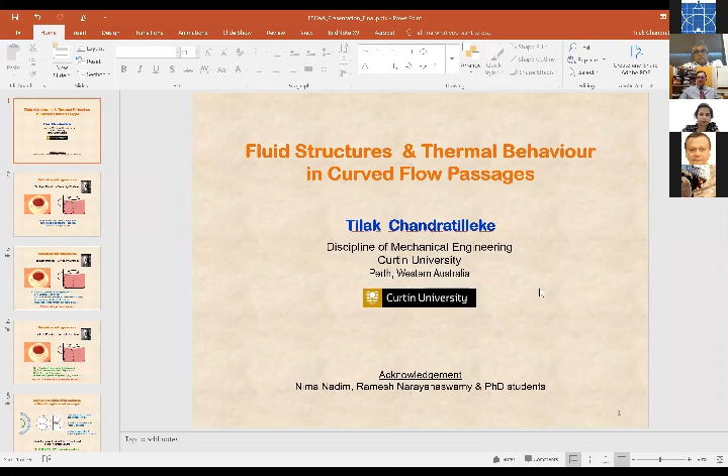So let me go back to my PowerPoint presentation. The title of my presentation is Fluid Structures and Thermal Behavior in Curved Flow Passages. Very simply, we are looking at curved passages and the fluid structures within that passage, which also brings in certain kinds of flow behavior. Normally the fluid flow passages are used to transfer heat or extract heat from a particular device. So that is the main thrust in this particular work or presentation.

Before I go into the actual details, I'd like to acknowledge my co-workers over the last maybe 20 or 15 years - Nima Nadim, Ramesh Narayanaswamy, and a numerous number of PhD students who have gone through my type of research and produced outcomes which I'm going to present to you. It's not just my effort, it involves a big team of people from time to time.

This particular observation of flow through curved passages initially came through a very simple day-to-day experience. If you have a cup of tea, like what I have shown here, and you start stirring it, you'll find that the tea leaves actually get into the center, not to the edges of the teacup. These days we have tea bags, so we don't have that tea leaf issue, but in the past we always had loose tea leaves. So when you boil water with the tea leaves, you have some leftover tea leaves. When you start stirring the teacup, you find the leaves don't go to the edges, they come to the center. Now this was quite puzzling.

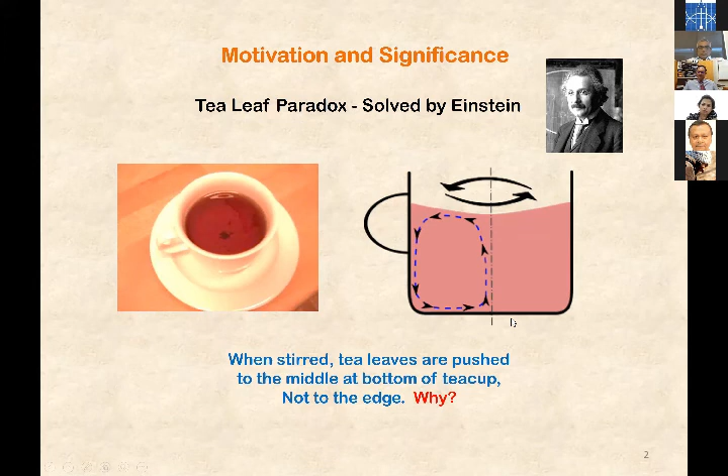In this particular process, what's happening is essentially that when you have a rotation like this, when you start rotating a fluid, it's the centrifugal forces at work. The centrifugal forces are the ones you observe or feel when taking a turn in a car, train, or other vehicle - you feel that somebody is being pushed to one side. Now this centrifugal effect creates a loop of circulation. We are turning the fluid along the vertical axis, but the circulation of water happens perpendicular to the direction of the rotation. This happens due to the pressure gradient between the outside and the center. That particular motion is always perpendicular to the direction of rotation.

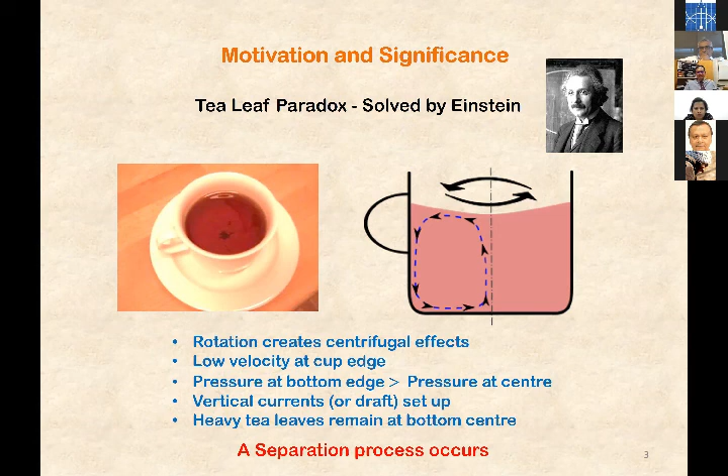So this is why the tea leaves come to the center and remain there - even while you're stirring, it stays almost stationary within the center. This is actually a clear separation process. If you want to separate the tea leaves from the liquid tea, you can apply this kind of process. This is actually being used by many technological devices in the past, and even in blood test situations, you want to separate the blood cells from plasma. So you have a rotational device, a magnetic kind of rotation, and through that rotation you can separate red blood cells, which are heavier than the plasma, to the center.

There are also cyclonic vacuum cleaners, modern vacuum cleaners, and certain separators in the cement industry, dust separators, and grain separators - you can use the same technique. And bladeless fans - nowadays we have bladeless fans and hair dryers.

I can't mention the brand, but you can easily guess what it is. These bladeless fans also operate on the same principle. Or when you go to the toilet, you see hand dryers where you put your hands in and it works automatically. That kind of hand dryer operates on the same principle. And in nature, we have atmospheric pressure systems, tornadoes, that kind of thing, which again have similar behavior. We have a rotational fluid mass, and then another rotation perpendicular to that motion.

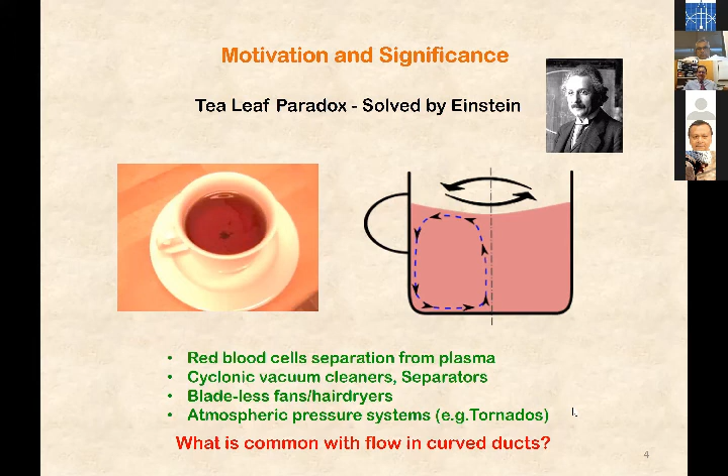So this is the clear motivation to do this kind of work in research. I undertook this challenge, and you might ask what is the common thing between what I just mentioned versus curved ducts, which I've been looking at. Now obviously there's a connection, and that connection is through the unique fluid structures or mechanisms that you find in flow through curved passages. That's what I'm going to talk about.

This particular fluid motion creates some kind of circulatory fluid motion within the channel. This behavior is clearly unique to curved passages. The circulatory flow is going to be superimposed on the flow through the channel itself. So the flow goes through the channel as an axial flow, and this circulatory motion is superimposed on it, giving a spiral kind of fluid motion to the axial fluid. This is not commonly found in any other pipe systems or geometry — in a straight pipe, the fluid flows directly through without this circulatory spiraling motion.

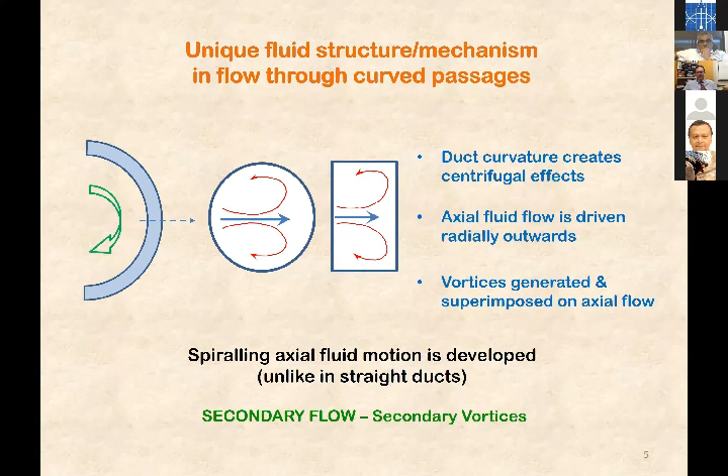Now it's not the end of the story — we can look at some other things as well. When the centrifugal force is in action, it also creates what's known as an adverse pressure gradient. Adverse means the pressure gradient developed by the fluid is against the fluid motion. You can see the fluid is flowing in the direction of the arrow, but the pressure gradient will be increasing in the same direction. That's not normal fluid behavior — normally fluid flows when there's a pressure gradient, but pressure has to drop from inlet to outlet. So here we call it an adverse pressure gradient, meaning it's against the fluid motion.

When this kind of flow happens, the fluid obviously gets slowed down as it reaches the boundary here, and also at the boundary on the other side. As you keep increasing the flow rate, at a particular point the flow reverses, because it can't remain there when the pressure is higher here compared to the other side. So the outer wall reverses the flow and creates another pair of vortices at the outer boundary. These additional vortices are called Dean vortices, named after the scientist who discovered this phenomenon, W.R. Dean. This phenomenon of Dean vortices appearing is called Dean's instability.

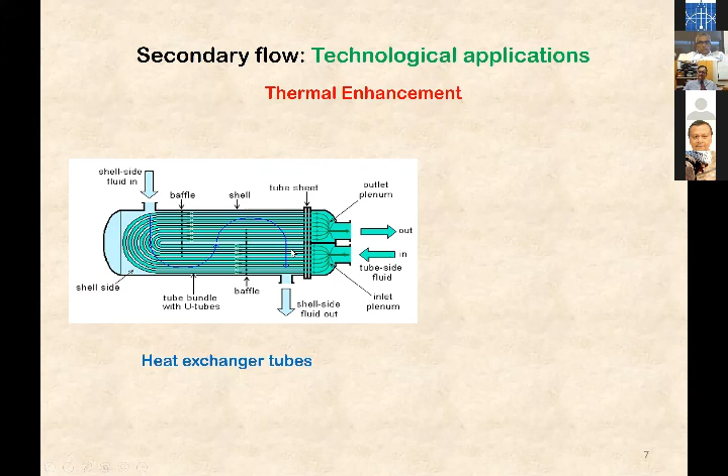If you take a normal heat exchanger, the fluid will go through a curved section - invariably you have a U-turn, or a baffle kind of flow. In all those places, secondary flow is in action. You don't see it, but it's happening in there. Similarly, you can have special geometries for heat exchangers. This is one I have developed previously - it's called the spiral coil heat exchanger, SCHE.

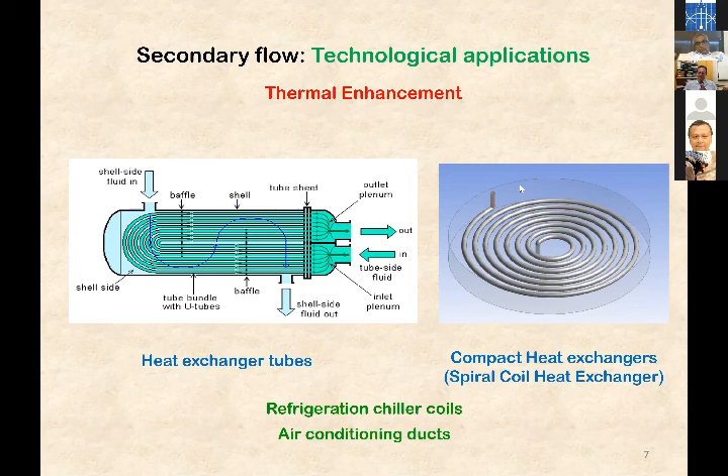You can use this kind of device for refrigeration, chiller coils, or air conditioning ducts. I have numerous projects I've attempted before in these areas. Thermal enhancement can be extended to much more advanced systems - turbine blade cooling is one option. The turbine blades have a curvature; obviously you have to have a curvature in turbine blades. As the fluid flows over the turbine blade, the cooling or heating mechanism is much improved due to this curvature effect as well. So that's another interesting option.

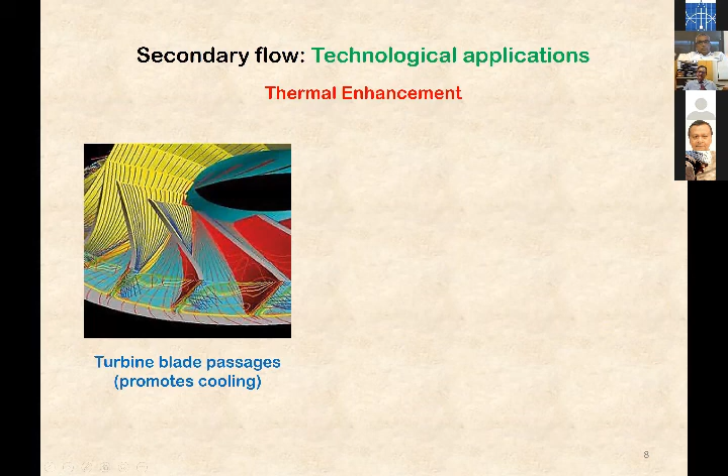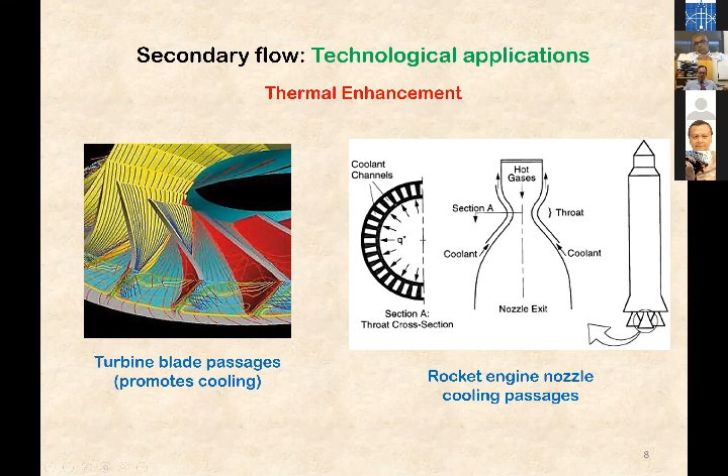Closer to home, we have more interesting applications like modern vacuum cleaners. You have cyclonic separators in modern vacuum cleaners. You feed the mixture of dust and air into that cyclone, and it sets up a rotational or cyclonic motion, and that motion separates solids out of the system, and the clean air can actually leave through a different path. So that is what you mean by cyclonic separation.

With that particular device, you can make vacuum cleaners without a bag. You can separate the solids. You can even have grain separators, the husk from the grain - for instance, rice husk can be separated from rice. You can also separate cement particles from air. All this can be done with this particular technique. This involves the secondary flow.

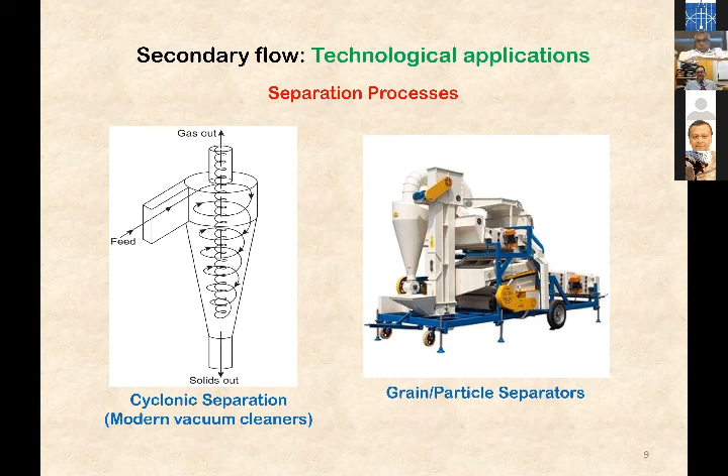You don't see that from outside, but that's the mechanism behind it. And in nature, we also find this kind of thing very easily.

If you look at a tornado, it has a very circulatory motion set up by the temperature differences in the atmosphere. That sets up the vertical motion. You can see the air mass around the tornado rotates in a circulatory manner, but the actual motion is vertical through that eye of the tornado. That's where the destruction is, because this is a very high speed draft coming through the center - that is the most destructive part.

Now that's what you see in this picture. You can see the tornado pulling out debris from the ground. Even houses, cars, and other things can be pulled with sufficient suction power in the cyclone. So that's again very much a secondary flow effect.

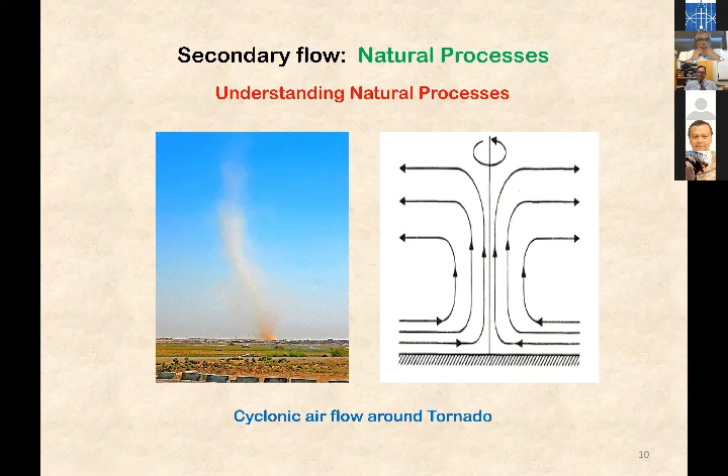Another very interesting application is riverbank erosion and sedimentation. Here we have a river going through a bend. The river takes a bend, and whatever soil is around the outer boundary is picked up by the secondary vortices and dumped inside the inner boundary. You can see the inner boundary getting filled while the outer boundary gets eroded in this kind of situation. This picture shows the sedimentation happening here and the erosion happening here.

So this is again very much a secondary flow effect, and that's one of the research areas that I have examined as well in my latest research.

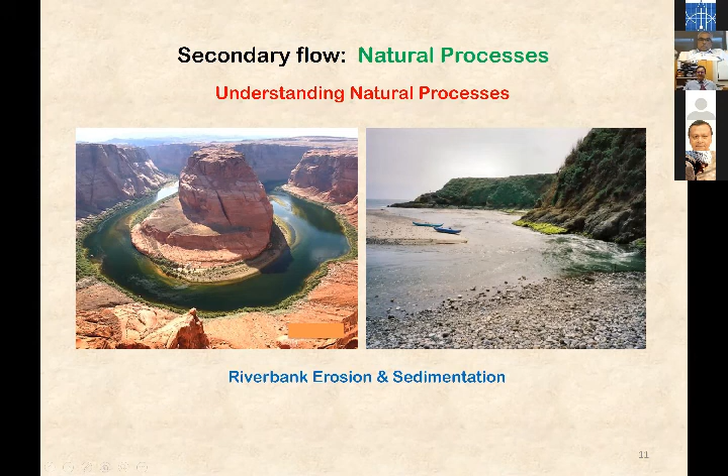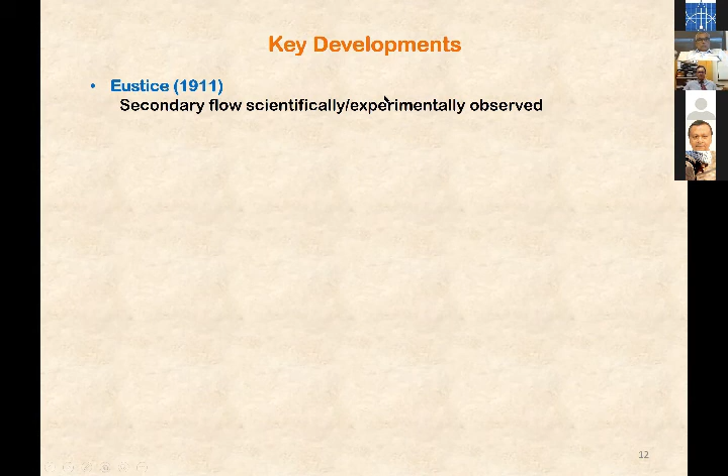So what are the key things developed over the years? The very first incident of secondary flow scientifically and experimentally observed was in 1911 - almost 110 years ago - by a person called Eustice. Later on, W.R. Dean - you remember the name now, Dean, the Dean vortices - related the secondary flow to a particular non-dimensional number. Now you might wonder what this non-dimensional number is.

I think those who have done engineering remember non-dimensional numbers. It has no units essentially - it's the same parameter divided by a similar parameter with the same units. So when you divide one unit by the other, the units cancel out and it becomes dimensionless. That's what you call a dimensionless or non-dimensional number. Normally in fluid mechanics, we use Reynolds number as a dimensionless number, but in curved passages we cannot do that - we have to have a different number. That's what Dean identified.

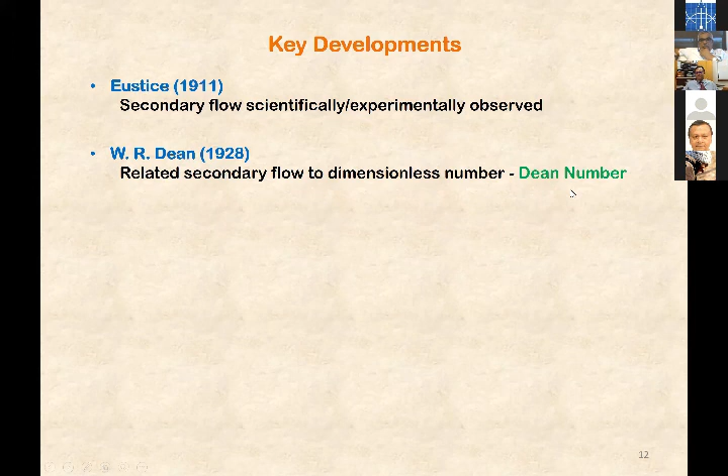Dean identified a special number called the Dean number, which is defined in this manner. Don't worry about why it's defined that way - I just want to show you the structure, and later I'm going to use that notation all the time in my discussion. This is the radius of curvature, or rather, this is the diameter of the passage itself, and that's the radius of curvature.

And this is the traditional Reynolds number, which defines the fluid flow. You can see the Reynolds number has been modified by the curvature ratio. This is Dh over R, what we call the curvature ratio to the power half. And then we have the Dean number, which is the notation we use to identify Dean number.

Every time you see capital K, we know it's a Dean number being referred to, especially in curved passages. The Dean number identifies that critical condition which requires Dean vortices to develop. Dean vortices are developed in relation to the critical Dean number. So we have a nice parameter which identifies when the Dean vortices are going to appear in a passage. That's a very powerful contribution to this field, because without that, we are guessing so many things. We don't know exactly when it's going to happen.

At lower flow rates, it doesn't happen. At higher flow rates, suddenly the Dean vortices appear. That transition from no Dean vortices to Dean vortices is determined or identified by this particular number called the Dean number, which is a very nice thing to have.

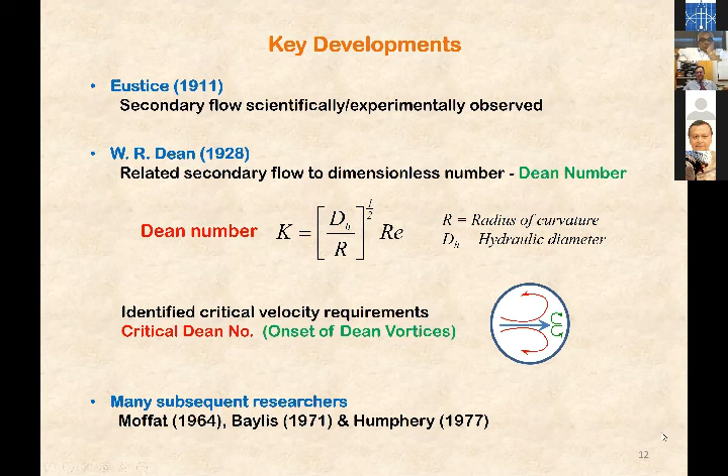Subsequently, many researchers went on to develop various ideas through their research. Moffat, Baylis, Humphrey, they are some of the key names at that time in this field. And then there was another major contribution by Cheng, whom I have worked with some time ago, and Sugiyama, a Japanese researcher. They looked at the Dean instability much more closely, and they identified that the Dean number itself is not good enough to identify the instability or the Dean vortex appearance. They mentioned that even the geometry has a role in that, and the curvature definitely has a role in that.

Lower the curvature, the higher the effect of this particular effect as well. So later you will see some of these effects.

Now, the most important thing here, Cheng et al. and Sugiyama, they developed this particular phase diagram. It's a diagram which identifies the boundary of the Dean vortices in the system. That boundary is defined by this particular line, which identifies when the Dean vortices are going to appear for the first time.

Now suppose we have a channel with aspect ratio 4. Aspect ratio means the height to width ratio in a rectangular passage. If you have a circular passage, aspect ratio is 1. So here we have, say, a B to A ratio of 4. If you work along this line, when the Dean number is lower than this particular value, there's no Dean vortices in the system. And when you go past that, all of a sudden Dean vortices appear.

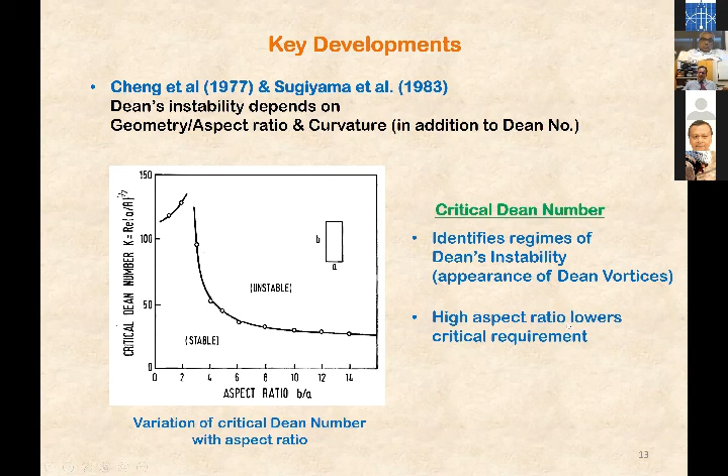Having gone through those previous developments, my name keeps appearing in this field because since 1998 up to now, I have made important contributions, especially developing 2-dimensional and 3-dimensional numerical models to describe this kind of secondary flow and onset of Dean vortices. We looked at many geometrical arrangements: rectangular passages, square passages, elliptical, and circular passages as well.

We looked at single phase and two phase systems. Two phase means you have two different types of fluids, or fluid and a solid, or fluid and a gas flowing together. You can also have granular or slurry flows in the system. We looked at so many different things, but obviously we didn't do this all at once.

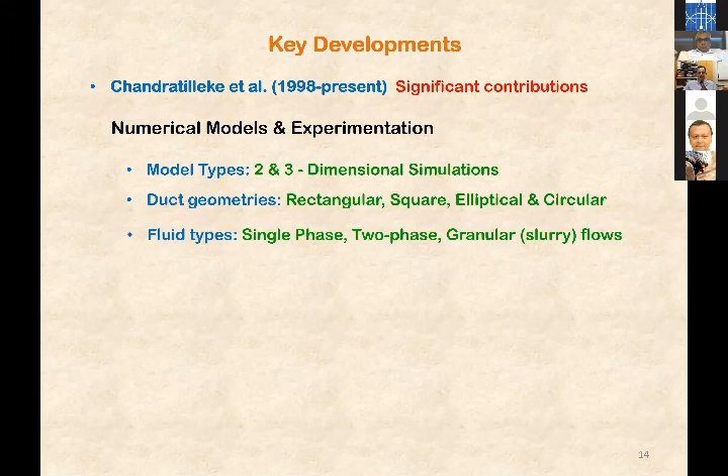It's a gradual development since, say, 1998 or a little later. We have been looking at ways to improve our research knowledge, and we gradually looked at different scenarios through the PhDs and so on. Some of the key outcomes, recognized outcomes, are listed here.

Obviously, we have to identify the Dean vortices. We can do numerical modeling or experimentation, but we have to have a technique to identify the Dean instability, vortex detection. Nobody had developed this technique, and through my research we developed two different techniques to identify when the Dean vortices would appear in the passage.

Without doing anything, we can actually identify that very clearly through a particular technique. I will talk about that a bit later. We also used secondary flow to optimize the thermal behavior of passages, using entropy.

I apologize if somebody doesn't know the word entropy. Entropy identifies what we call irreversibility in systems, in processes. That means when you do some process, you cannot get back to the original state, because we have a natural direction in a process. It's like water flowing from high elevation to low elevation - to pump it back to the high elevation, we have to have additional energy pumped into that. So that kind of one-directional flow system is identified by entropy.

Using that technique, we were able to optimize thermal behavior of certain passages as well. We have also extended the research in secondary flow to two-phase systems, which people hadn't done before, and non-mixing fluids, something like oil and water flowing together, or air and water flowing together, and also boiling systems - that means steam and water flowing together. So we've looked at the entire range of possible combinations of fluid systems through the passages.

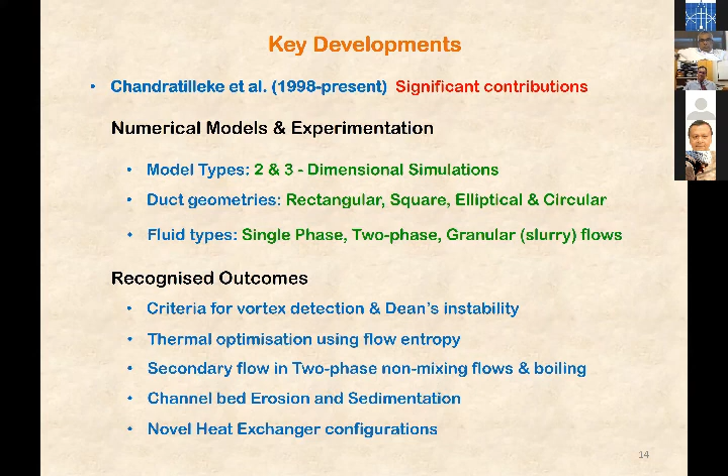Initially we did fairly elementary experiments. We simply have a curved passage like shown here, two passages communicating through this kind of heat transfer wall, where one fluid is hot and the other fluid is cold, with a curvature in the passage. Then we looked at thermal behavior, how this particular heat exchanger is going to behave, and compared that with the equivalent straight heat exchanger.

We compared the two and noticed a significant improvement in heat transfer performance in that particular heat exchanger. We can achieve something like 17 to 23% better thermal effectiveness in curved heat exchangers compared to a straight heat exchanger.

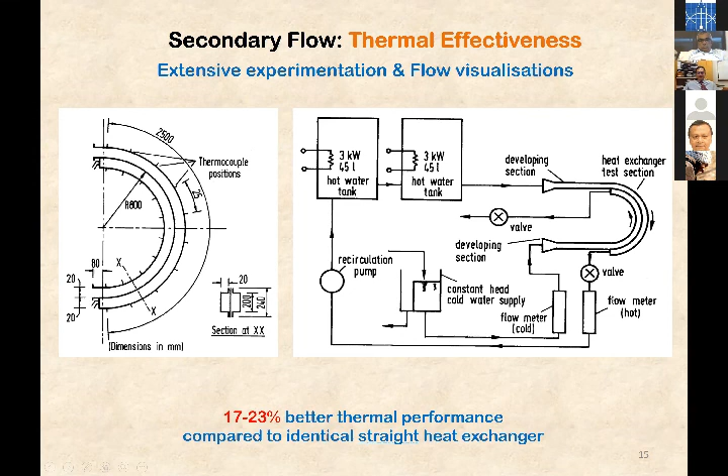We then went on to look at the spiral coil heat exchanger, which has a varying radius of curvature. You can see this kind of layer here, and you can have multiple layers like this so it can handle a large volume of fluid passing through. We did a lot of testing on this kind of thing, and again we noticed a significant improvement in thermal performance.

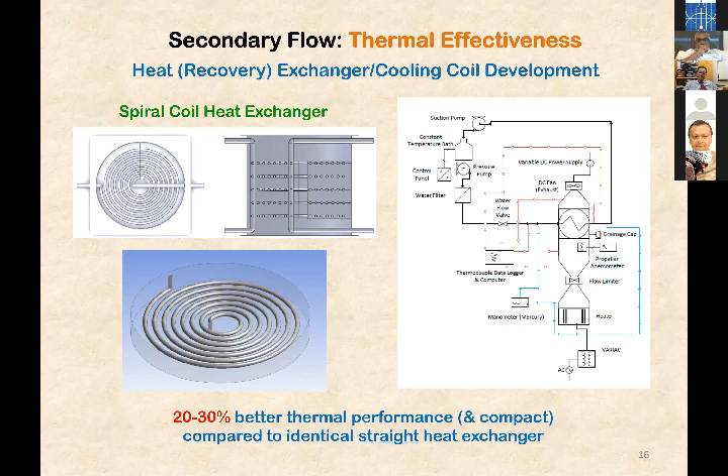We have 20 to 30% thermal performance or thermal effectiveness, in addition to the compact nature of this kind of heat exchanger compared to a straight heat exchanger. If you take this spiral coil heat exchanger and make it very long, you can imagine the dimension - it would be a very long heat exchanger, and it would not have the same effect as the spiral coil. That's a huge advantage in this kind of situation, and that's one of the major things we have done.

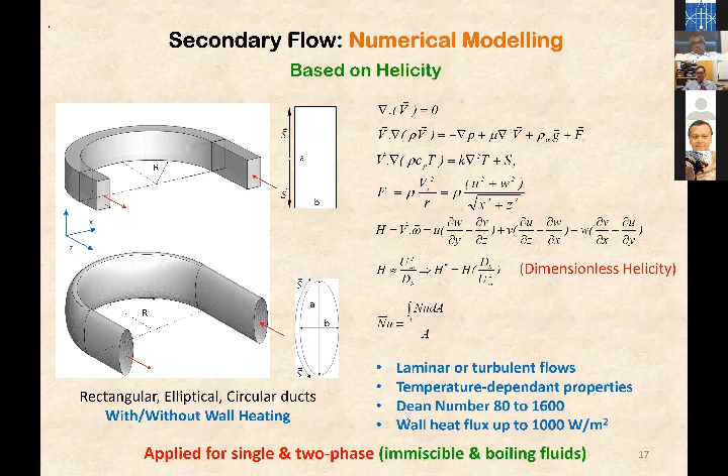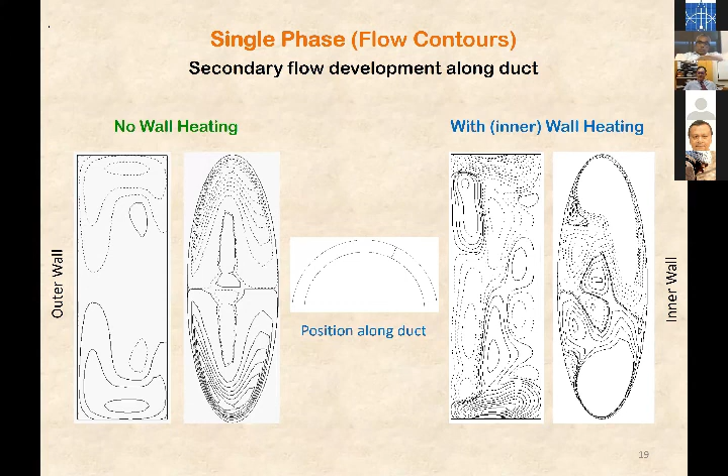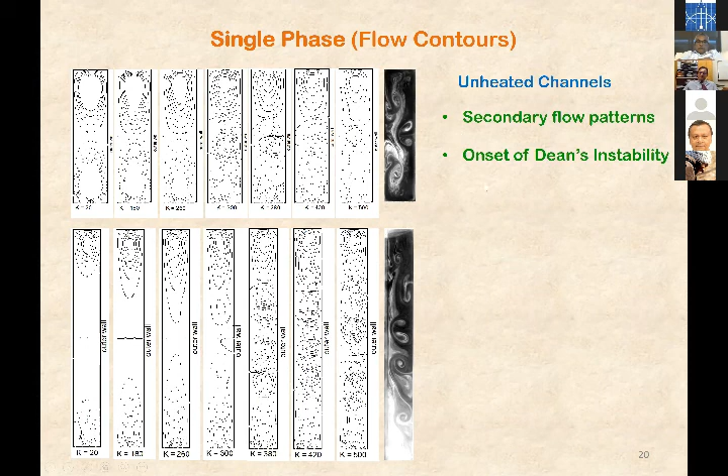The main thing I want to show you here is that with our analysis, we were able to predict the secondary flow development in a passage, and also compare that with the experimental results, and predict the onset of Dean vortices very clearly. We were also able to show how the Dean vortices are going to grow within that passage as we increase the Dean number or the flow rate through that passage. So we are very much in progress along these lines, and we also notice one important thing.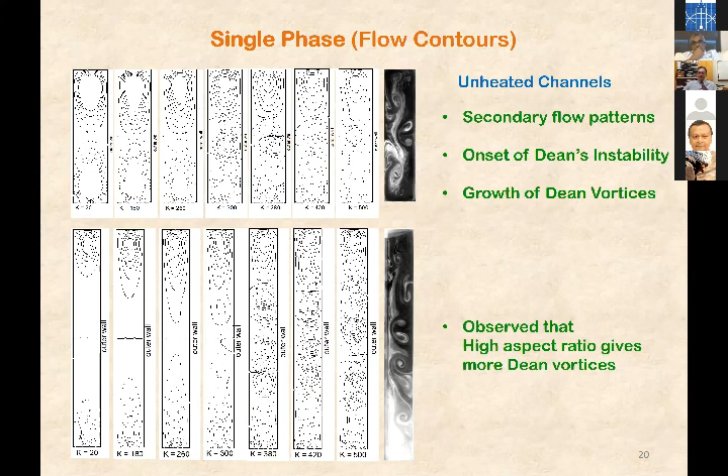With the high aspect ratios, we have more and more Dean vortices appearing in the passage. That is something people haven't seen before. Through our experiments, we showed that you can have more than one pair of Dean vortices in a passage. So these are very important observations in our field.

And then with wall heating, this is the effect of wall heating. We are looking at outer wall heating at the top here, when the outer wall is this right-hand side in this case. The moment you start heating the wall, you will find that natural convection is initially dominant. You have a large loop of fluid flow like this happening. Then as you increase the flow rate, the centrifugal effects will gradually become more and more dominant, and you have the secondary flow or secondary vortices developing from the bottom of the passage, suppressing the natural convection circulation. So that's what we see experimentally as well.

In this particular case, you see that there aren't any Dean vortices appearing in the passage. Now, if you keep increasing the flow rate, at some point you can overcome the natural convection effect completely, and then the centrifugal effect will take over and start producing the Dean vortices again as well.

Then with the inner wall heating, we apply the heating from the left-hand side now. In that case, the circulation loop will be slightly different. It happens in the clockwise direction in this case. Then as the secondary flow becomes stronger, it begins to form from the top. Previously, secondary flow started from the bottom, but now it's going to start from the top.

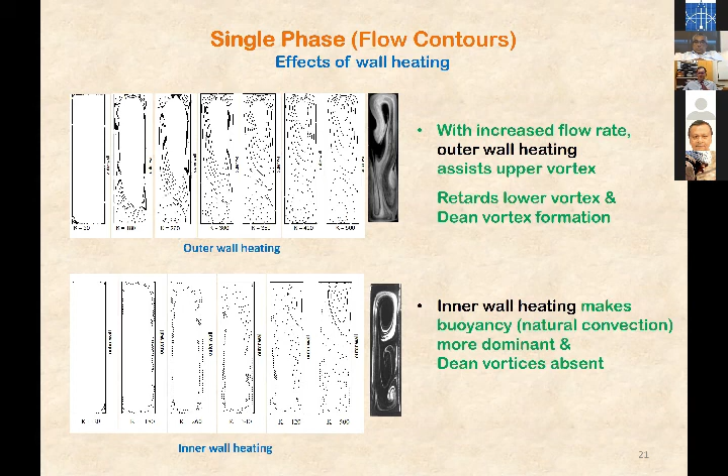Now, the opposite thing happens when you have the convection from the inner wall. In that case, the inner wall will actually suppress the upper one, and then gradually the natural convection becomes more and more because of the suppression. But in this case, we didn't notice any Dean vortices appearing in the system at all. Whereas in the outer wall heating, we could achieve Dean vortices a bit later in the flow with higher flow rates. But here, with the inner wall heating, you have difficulty getting the Dean vortices even with very high flow rates, because of the direction of the natural convection loop happening there.

So for that reason, we notice one important thing - that we can always achieve higher heat transfer rates with outer wall heating than with inner wall heating. So that is one of the clear observations, or clear conclusions, we obtained from this particular work.

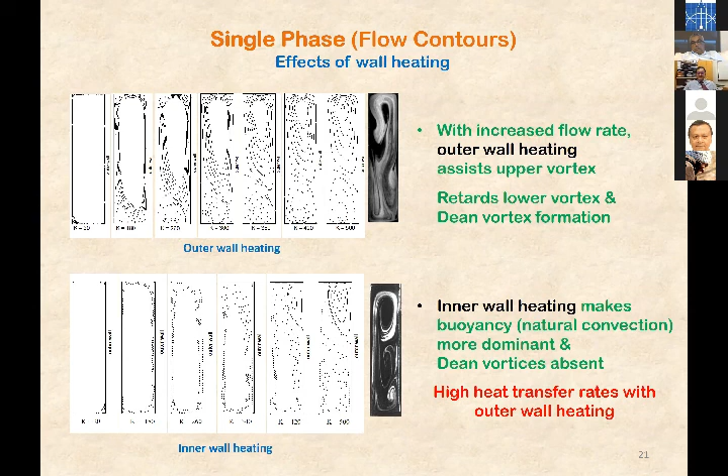Now, this is the same sort of pattern for elliptical shapes. You can see the shape is slightly different compared to the rectangular ones. And this is the circular shape - this is the first time you're seeing the circular shape. Now here, in rectangular as well as elliptical shapes, the outer wall has the Dean vortices. The appearance of Dean vortices happens only at the outer wall. But in circular duct, it doesn't do that. That's the unique difference between circular kind of cross sections compared to rectangular or elliptical shapes.

Now in circular ducts, the secondary flow happens as usual, like a big loop, which you can see in the very first picture here. And the Dean vortices will not happen at the outer boundary - it happens in the middle. It happens nearer to the outer boundary, and then it migrates slowly to the center. So that is a bit of a headache. It gave us a bit of a headache initially, because we developed certain techniques to identify these Dean vortices at the outer wall, but that system doesn't work for circular passages. So we have to come up with some other new technique - I'm going to talk about that in a minute. That's a big difference between circular passages compared to elliptical and rectangular ducts in this case.

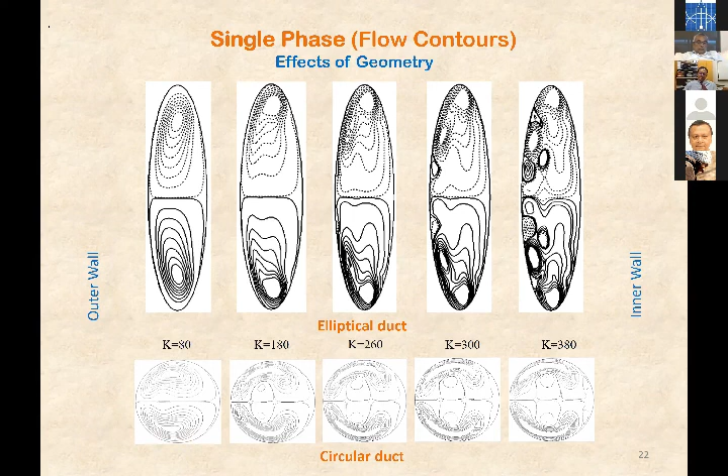Now, how do you detect Dean vortices? That's a very important thing in this kind of research. We got to know exactly when the Dean vortices are going to appear in the passage. Initially we thought only the outer wall will contribute to the production of Dean vortices, so we looked at the outer wall and looked at the pressure distribution along that line.

We have a certain fluid pressure applied to the outer boundary, and we looked at how it varies. We noticed that the fluid pressure goes up and down in a symmetrical manner between the two sides. When you increase the flow rate beyond a certain point, you suddenly find the gradient changes. You can see the red circle identifies where the gradient is positive in pressure, and then gradually the gradient becomes negative. We have another case like that as well.

So we looked at this as maybe a very good way to identify the occurrence of Dean vortices. That worked beautifully throughout our experiments and numerical work with rectangular and elliptical passages, no problem at all, because we simply identified the negative-to-positive change in the pressure gradient along the outer wall. But unfortunately, it didn't work for circular passages.

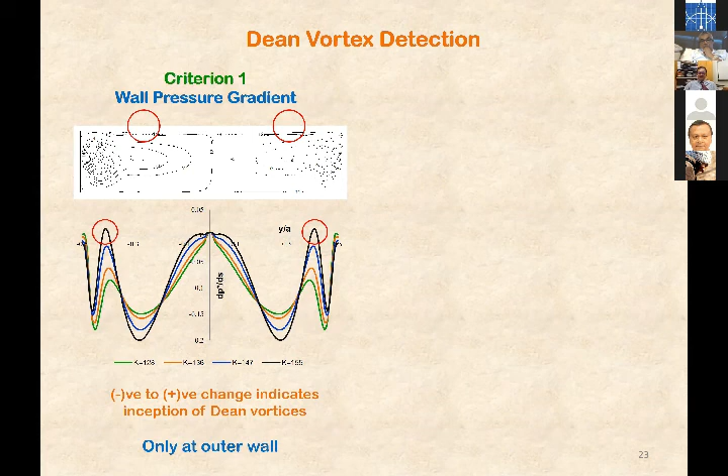So we had to rack our brains to identify some other technique, and that's exactly what we did with this new technique, which is like defining the boundary layer thickness. Those who have done fluid mechanics will know what I mean by boundary layer - the viscous layer next to a solid surface when fluid is flowing over it. There's a change in velocity from 0 to a particular value through that boundary layer thickness. We can define the boundary layer by defining a certain sensitivity to the velocity change from the wall at 0 to the full velocity in the fluid.

So we can do a similar thing here - we can define the helicity magnitude as a parameter. We define, say, 0.01 non-dimensional helicity velocity, and that allows us to identify the Dean vortices with a certain precision. We can refine that precision by making it smaller and smaller - for instance, 0.001 or 0.1. If you make it 0.1, the contours become coarser; at 0.001, it becomes much finer. That way we can precisely locate the existence of the Dean vortices as a physical mechanism.

So that gives us a very powerful technique, and we are the only people who actually developed this kind of technique in the world. It's being used by everyone at the moment. This technique is universally applicable for any type of geometry, whether rectangular, elliptical, or circular. The pressure gradient technique is only useful if the cross section is not circular; otherwise it doesn't work.

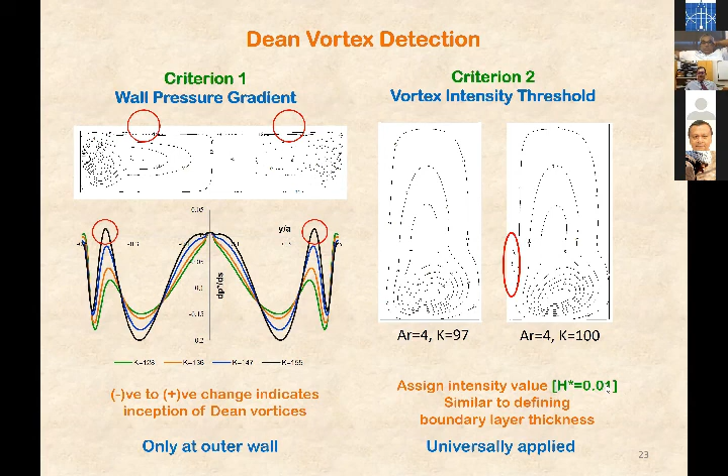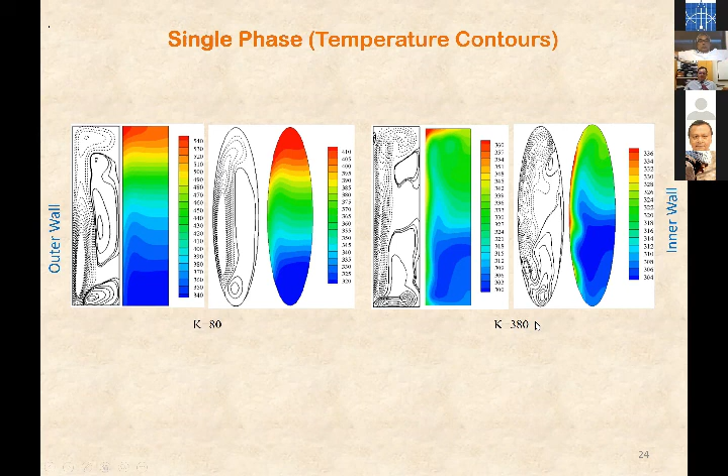That identifies a particular mechanism by which we can do thermal modeling or thermal optimization in passages. We notice one important thing: the elliptical ducts are more affected by wall heating because of their shape. The shape supports the circulation due to natural convection. When you heat this elliptical shape on the outer boundary, the shape itself supports the circulation in that passage, whereas in a rectangular passage you have dead areas for the fluid.

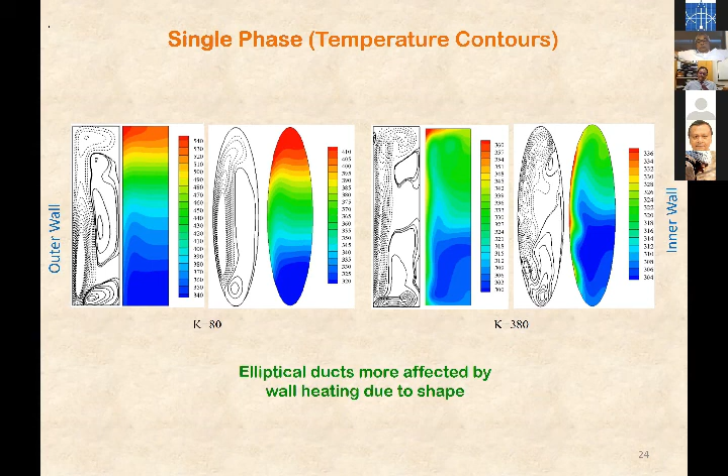The fluid has to go through a little obstacle in that passage, so there's a difficulty for the fluid to follow that path, whereas in the elliptical shape it can follow the path more easily. This has a certain significance which I'm not going to fully explain at the moment.

Now, how do I optimize? We know the temperature profiles, but we cannot simply use that to optimize thermally. To optimize thermally, we need to look at a different parameter called the Bejan number, developed by a famous scientist called Adrian Bejan. I know him and have worked with him on certain problems.

The Bejan number identifies the thermal effect versus the total combined effect from heating as well as frictional effects. To do that we had to define a bit more complex situation here, and that complexity comes from defining the Bejan number. I'm not sure whether you can see this because there are some pictures in the corner.

The Bejan number essentially looks at the irreversibility in systems due to thermal effect, divided by the irreversibility due to thermal effect and frictional effect combined together.

The Bejan number is defined as ST, the thermal effect, divided by ST plus SP, where SP is the frictional effect due to fluid motion. We add ST and SP together to get the total entropy change or total entropy behavior, and then we compare ST versus the total entropy in that system.

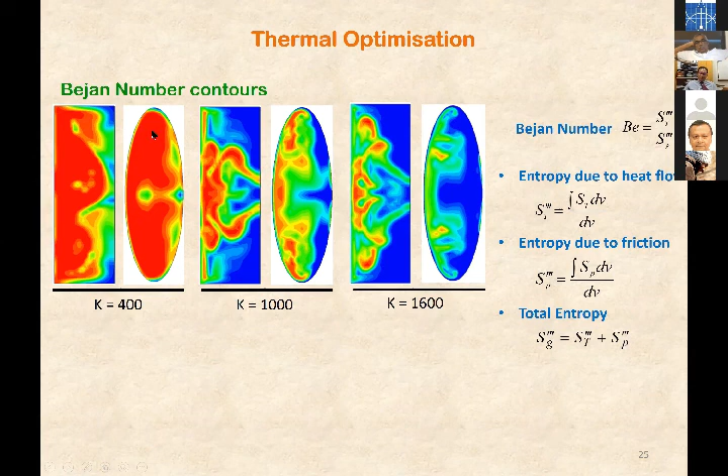Mathematically, we take a very small fluid element and look at how much thermal contribution there is and how much viscous contribution there is, add them together, and look at the ratio between the thermal effect versus the total effect. These contours identify that Bejan number.

When the Bejan number is 1, it is completely red, the whole space filled with red. When the Bejan number is less than 1, close to 0, the whole passage becomes blue. So there's a transition happening in terms of Bejan number, starting from red and gradually going through a transition all the way to blue, whether it's a rectangular passage or an elliptical passage.

This allows us to optimize the thermal behavior without looking at many other parameters. This is the only kind of analysis people have done in the world - we are the only people who have done this. It's been published very clearly and it's a highly cited publication.

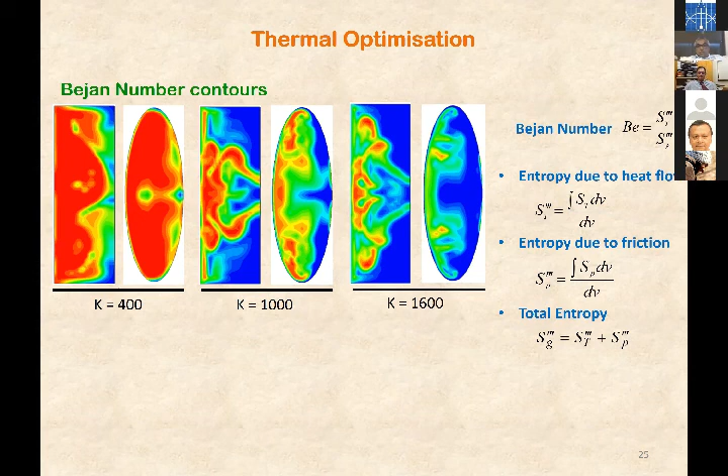When you increase the Dean number from 400 to say 1600, there's a gradual transition from thermal effect to viscous effects in the system. In other words, the thermal irreversibility becomes less and less while frictional irreversibility gradually becomes more and more. This means we have an option of optimizing the entire process, seeing where the minimum of these two combinations lies.

If the system is blue, it's good for mixing of the fluid. When the system is red, it's good for heat transfer. System is providing better mixing when it's blue, so we can actually do an optimization based on that.

This transition is much more pronounced in the case of an elliptical shape compared to a rectangular shape. In the rectangular shape, even at 1600 Dean number, you still have some reminiscence of red left, whereas the elliptical shape has become more blue compared to the rectangular shape.

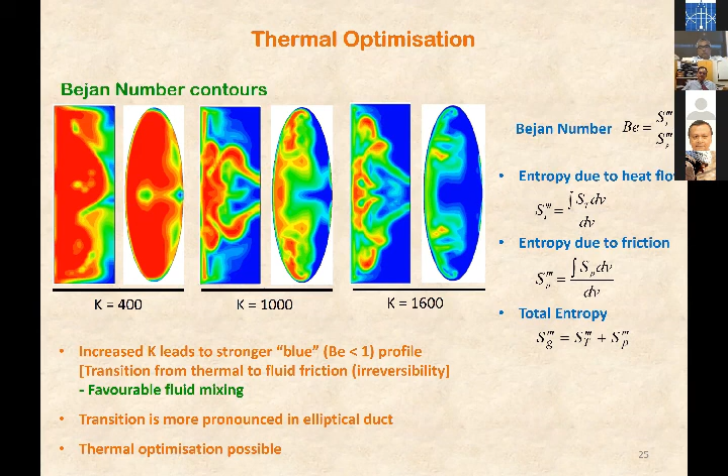Because of this transition, we can actually do a nice optimization in thermal systems. Here I'm looking at rectangular duct, and I'm looking at all those ST, SP, and ST-to-S-total combinations, and how they vary as we increase the Dean number, both for rectangular duct as well as elliptical duct.

The blue line indicates ST, and it keeps dropping like this as you increase the flow rate. Also in the elliptical duct it will drop, but at a different gradient. The gradient is different, and then if you look at the black line, that's SP, the frictional effect.

It keeps increasing, more or less the same way in both types of ducts. And when you add them together, you will see that the total irreversibility or total entropy has a slightly different behavior. It has a minimum at a certain point, but this minimum is higher than that minimum, which means the rectangular duct behaves better as a compromise between thermal and viscous effects compared to elliptical ducts. So that's what we have noticed.

So we have a point of inflection which identifies the possible trade-off between the frictional effects and the thermal effects. The highest thermal benefit with the least friction is obtained at that inflection point, and it is good for the rectangular duct, better than the elliptical duct. That is the conclusion we came to, and it's a very important observation, as it identifies which shape would be better for certain applications.

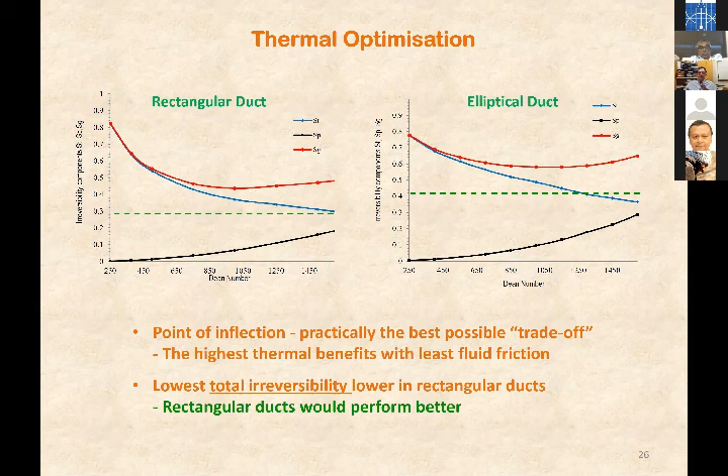Now, based on our experience in these problems, up to this point we have been looking at single phase fluids. So now we want to extend that to two phase fluids—mixing fluids, non-mixing fluids, and various other solid and liquid kinds of fluid flows. This becomes much more complex, and the mathematical modeling becomes even more complex. We have the fluid flow, the heat flow, and on top of that two different phases going together at the same time.

And it becomes even more complex when you have a boiling situation, because you have mass transfer happening—the vapor will condense or the liquid will evaporate. So we have heat transfer, mass transfer, fluid flows, and all the other usual fluid flow issues as well, like turbulence effects.

On top of that, we have another problem: heat partitioning at the wall of the pipe. The pipe provides the heating for the fluid to boil, for instance, in a boiling situation. The way heat is transferred from the wall to the fluid is determined by many different mechanisms—conduction, convection, evaporation, and then a drying out kind of situation. All these things we have to consider in developing a model like this.

I'm not going to show that particular model to you—it may not make sense to you at the moment, it's a very, very complex thing. This is the highest level we have achieved in problems like this; everything else is a little downhill in terms of mathematical complexity. So this is a very complex problem now, much more than single phase.

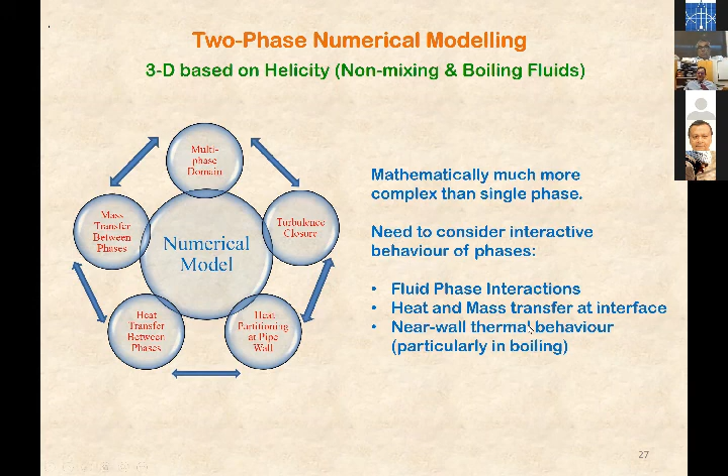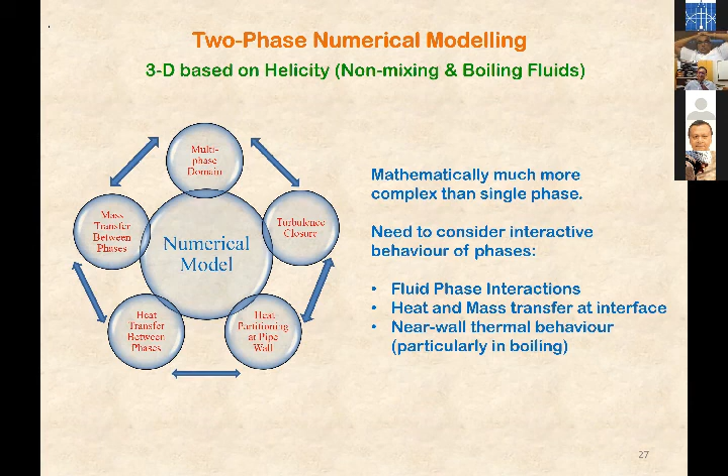We need to consider interaction across all the phases involved—phase meaning different types of fluids or substances flowing together. We also have to consider heat and mass transfer interactions and near-wall thermal behavior, particularly in boiling. These things make it very complex, and we took quite a while. You can see how different PhDs have been produced along this path, as I worked with different groups of students, developing this one by one at different times and in different capacities.

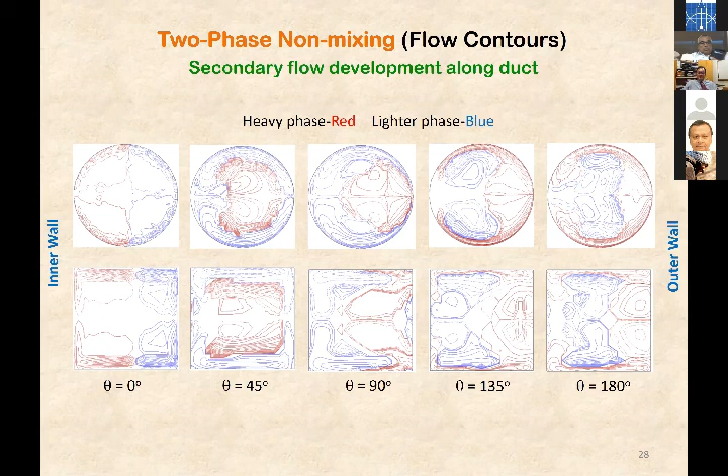Same thing happens - the heavier fluid is pushed to the outer boundary and the Dean vortices appear like this. Now, it is not clearly illustrative here, so I'm going to show you next an operation where we look at actual volumes of fluid for the heavy phase and the lighter phase, identified by red and blue correspondingly, and how they behave through the passage. So at inlet, heavier fluid is on the left or inner wall.

And the lighter fluid on the outer wall, or right hand side. Then as the fluid flows through the passage, the heavier fluid is being pushed like a bullet through the center, like somebody passing through traffic, penetrating into the lighter fluid and then coming back to the center. Now this is again not very illustrative.

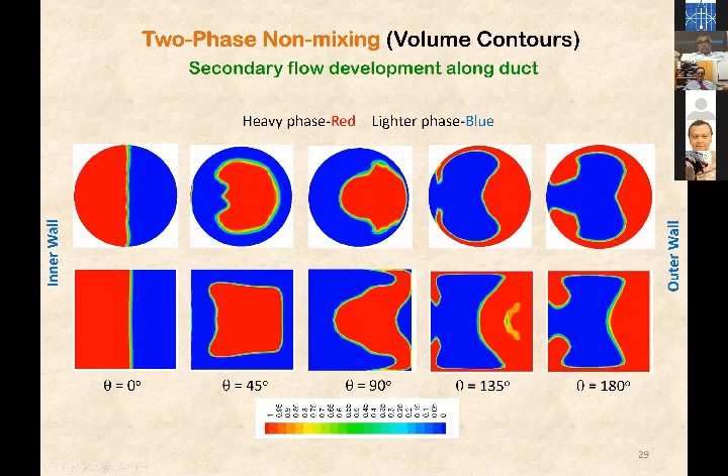If I show you the animation, you will see how it's going to happen nicely. So this is the animation again, showing the inner wall carrying the lighter fluid, the heavier fluid, and the outer wall carrying the lighter fluid, both for circular passages and rectangular passages. The location along that line indicates which cross section we are looking at in a particular instant in time. So let's see the animation.

You can see how the heavier fluid is going through that center part and then embracing the boundary and coming back to the center. Now, this kind of observation - we are the only people who have done this kind of work and published this kind of research up to now. So you can see how the predictions can be done in this manner, and we have done experimental work as well to identify this kind of behavior and conclude various operations in this way.

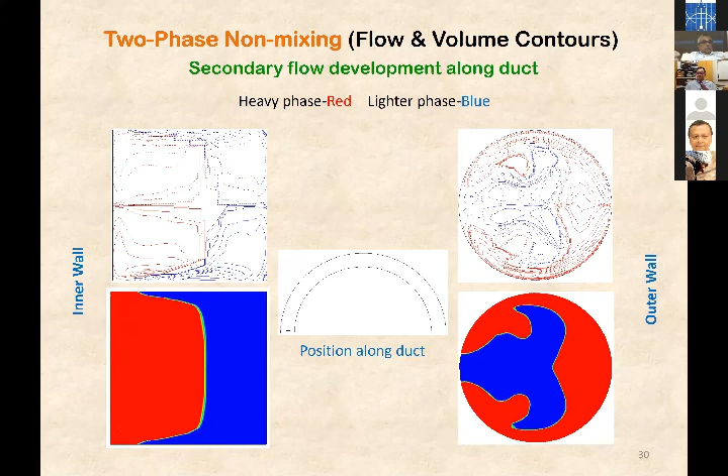And then the most advanced one, of course, is the boiling situation - that means vapor and liquid flowing together. Now this is probably the most interesting one in terms of technological applications. Here I have the top line - a straight pipe, which is heated along its periphery, along the boundary.

And then, of course, when you heat it, the boiling begins to happen, and you can see the red gradually appearing along the boundary here. The blue section is the liquid in there. Now you can see immediately the corresponding curved pipe situation below here. We have already got vapor in that, whereas in the straight pipe, you haven't got any vapor at the moment, very slight amount of vapor along the circumference.

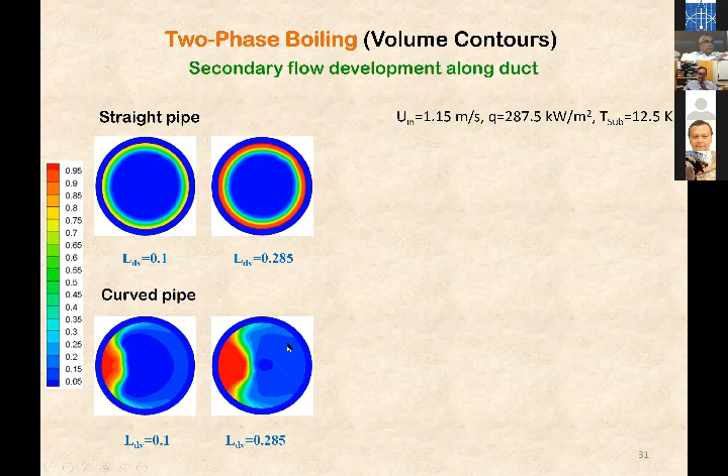But you can see the boundary is mostly exposed to the cooler fluid, cooler liquid. The steam is hotter and the liquid is cooler on the boundary. If you go to the next cross section, we are gradually moving along the pipe to a new cross section. You can see more vapor has been produced here, and more vapor, of course, has been produced here. But in the case of the straight pipe, the vapor is surrounding the core of liquid in the middle, whereas here, the vapor is actually confined to the inner boundary, while the outer boundary is exposed to the heated wall.

The heated wall is exposed to the liquid in the pipe. That means we have more opportunity to create vapor along that boundary rather than having vapor right around the boundary. So that's what you see as we progress in this passage - the vapor is here, much thicker layer, and we still have only liquid here, partial liquid, and the vapor is confined to the middle mostly. Now, what is the importance of this kind of observation? The vapor is like an insulating blanket around the liquid, so it prevents any heat going into the liquid further.

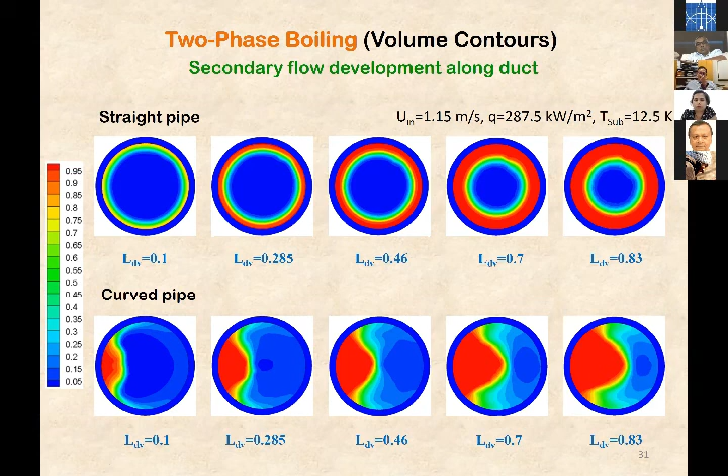So which means it actually affects the steam production rate, whereas in a curved passage, the liquid is still in contact with the heated wall. That means you have more opportunity for the liquid to be converted into vapor more and more - that is the advantage in this kind of operation. It creates a better opportunity to produce more vapor. The reason for that is the liquid is heavier compared to vapor, so liquid is always pushed to the outer wall and vapor to the inner wall, and therefore more liquid is always in contact with the heated pipe surface.

Now that's a very important thing in this kind of design, and it allows you to have better efficiency in systems.

Now let's see the animation. You can see how the boiling actually happens. The red is the vapor mass and the blue is the liquid mass. You can see the blanket effect around the heated surface is not there in curved passages.

And because of that, you can produce steam in a more effective manner in curved passages compared to straight passages. I presented this at one of the conferences in Switzerland some time ago, and a lot of boiler manufacturers were thrilled to see this kind of behavior, because nobody had actually understood this phenomenon before. This allows a massive jump in vapor production efficiency with very little wall superheat.

Whereas in the case of a straight pipe, you've got to have a very large temperature difference between the heated wall and the liquid to pump the heat from the surface to the fluid. Here, you don't need that kind of massive temperature difference to pump heat into the liquid. So it's a very useful consideration for boiler design.

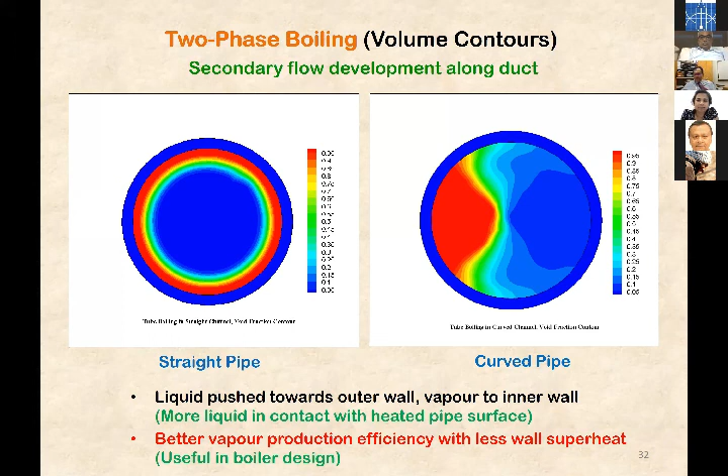So having done all the thermal work and modeling, our next step is to go into more natural behaviors, especially riverbed erosion or sedimentation problems. One of my very good PhD students worked on this particular problem, and he just got his PhD in February this year. With all the difficulties we had with COVID, he managed to finish the work very well.

So here we have a curved passage, as illustrated. The bottom of this passage is filled with a certain amount of granular material, like sand. We can change the sand density, and have different particle sizes and grain sizes. So we can actually recreate what's going to happen to the riverbed when it takes a turn in situations like this.

We developed a special technique to measure the profile, using special laser pointers, and took coordinates along the cross section at different locations. Here I've shown only a couple of points, but we were able to get a lot of points along the cross section as we progress through the flow problem.

So as the flow passes through the channel, the profile of the bed will change as shown here. Initially it's flat, and then gradually, due to the erosion caused by the secondary flow, the bed will change. We were able to look at that particular behavior.

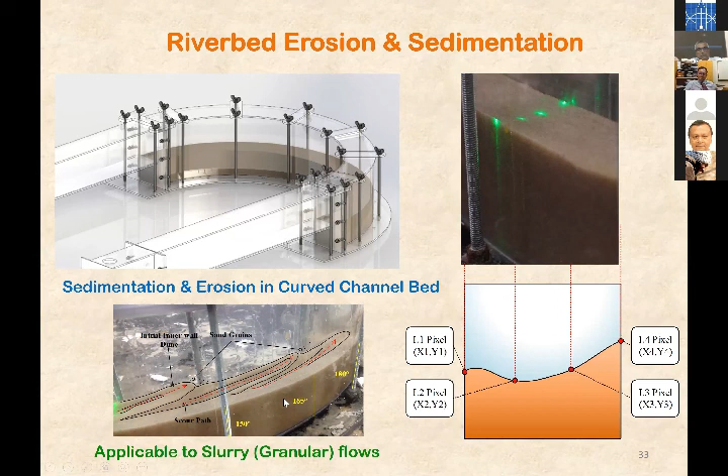Now here you can see in this diagram, we have marked certain boundaries like this. These boundaries are what we call dunes. If you go to a riverbed, and if the riverbed is dry with no water, you will see some sort of pattern developing there. That's what you call the dunes, and they are developed because of the secondary flow action in the fluid.

In our experiments, we were able to capture that in a video.

And obviously in a thesis, we can't present the video in that manner, but here you have the option of seeing that kind of erosion. So this is the profile. This erosion happened due to the secondary flow motion in the passage, and later you will see how it actually moves.

So let's see the video. There you can see the particles are being picked up by the secondary flow and gets washed down along the passage. You can see the dune formation in here.

And if you look at the entire passage, it's a long passage we had, very long passage, large curvature and so on. A lot of water, a lot of sand all over the lab floor when we were doing this experiment. A lot of leakages, you can see on the floor there, so much of leakage, and a lot of technical problems we had to resolve in doing this as well. Eventually somehow we managed to do this kind of work. It's a beautiful piece of work, and I'll show you that once again.

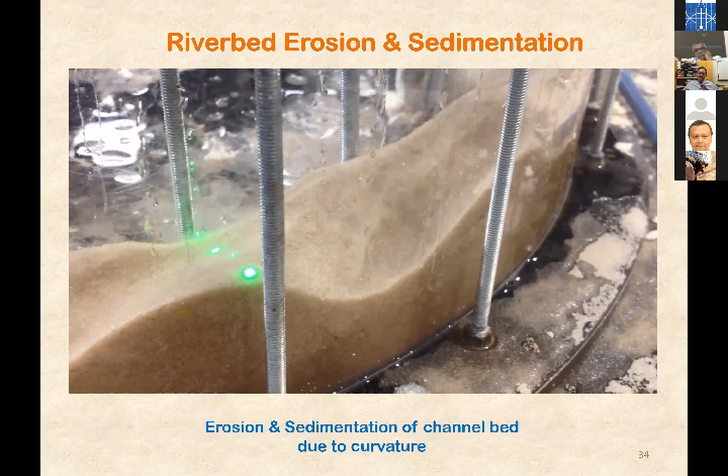And then you can see how the secondary flow is in action in here. We have more advanced measurement techniques as well. We have the particle image velocimetry we can use. We can illuminate fluid flow with laser fluorescent particles, and then we can actually see the flow patterns as well. So we are slowly developing more advanced techniques as well.

So in addition to all these things, I'm doing a lot of other research in different areas. This is my PhD work, essentially, the microlayer evaporation, how the liquid evaporates in a boiling situation. You have a bubble, and how the liquid evaporates and produces vapor, and how the bubble shape changes, and how it leaves the heated surface. That was my PhD at that time.

A very complex experiment. It looks simple here, but extremely complex, because the life of a bubble is only less than a quarter of a second. So you've got to have a very sophisticated way of observing various things, the temperature at the base, the evaporation, and all these things. Very complex. I'm not going to go into details of that.

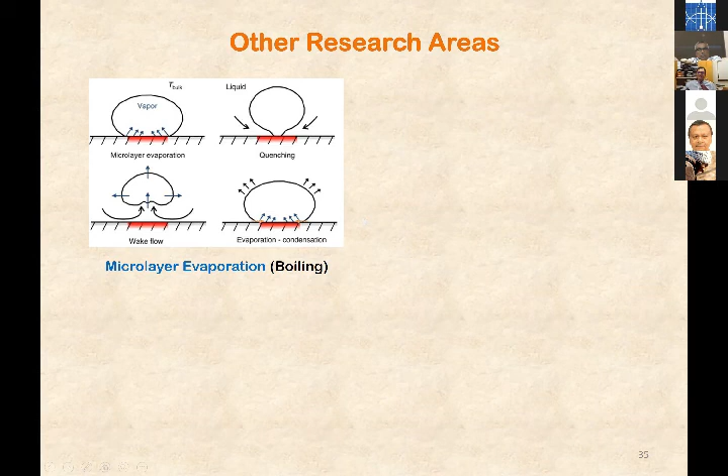And another important, very interesting work I have done is called the pulsed jet cooling mechanism. This is used for electronic cooling. So here we have a chamber with two diaphragms on either side, oscillating with a certain combination, and that will expel a jet of air through the orifice here, directed to a cooling surface like this. This is like a CPU in a computer.

Now this particular jet is not continuous. When the diaphragms are moving inwards, it will have the jet. When it's moving outwards, the jet stops. So this is an intermittent kind of jet operation, which is a very powerful technique to cool electronic systems. We can use normal air. You don't need any liquid circuits or air circuits, because we draw the air from atmosphere and expel through the orifice again into the passage.

So it's a very simple technique, and this has actually been well publicized in the past. About 2-3 years ago, we had press interviews and all sorts of things when we first identified this particular behavior. It's a very effective technique for electronic cooling, and we have looked at how it behaves with a cross flow across that as well, like when the jet is coming down, we have another flow going across, disturbing this flow, and how it's going to influence that. All this we have looked at in the past, and so many PhDs have come out of this kind of work as well.

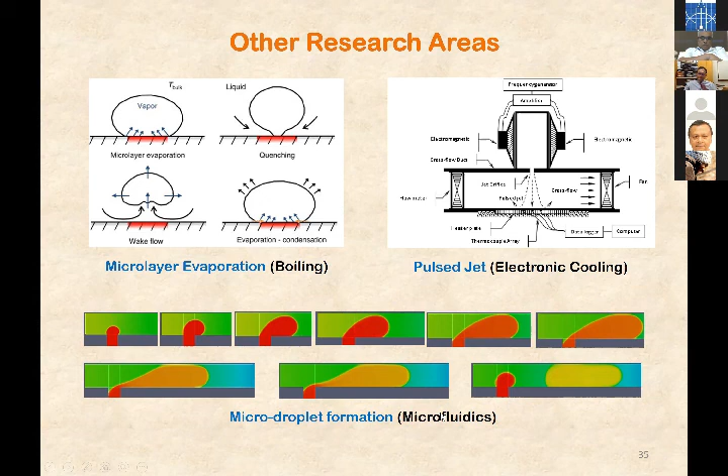So I have looked at this kind of thing as well. Anyway, this is the summary of the work I have done all these years. Our research has significantly contributed to better understanding the secondary flow behavior and its implications. We have looked at fluid flows and thermal behavior in curved ducts in great detail in different situations. We have come up with thermal optimization techniques, and we know how to interpret certain natural phenomena as well, like erosion and sedimentation.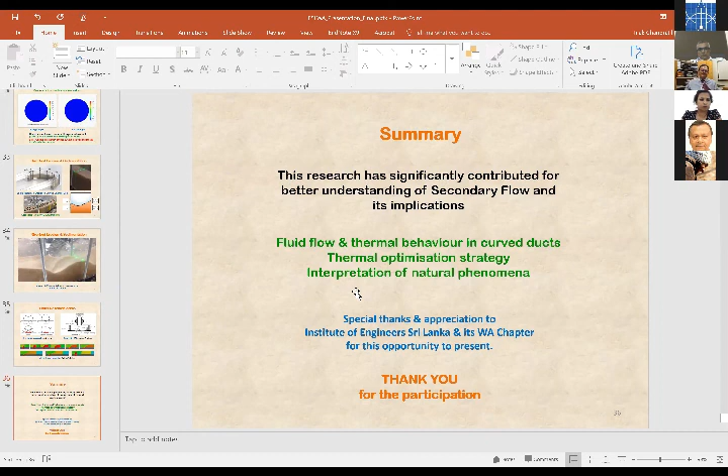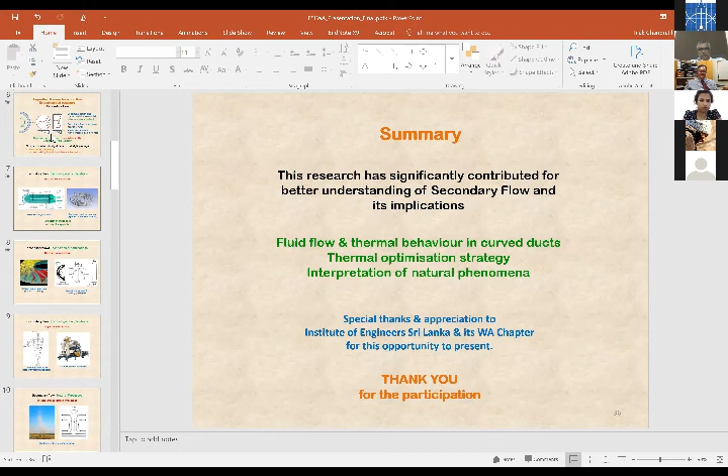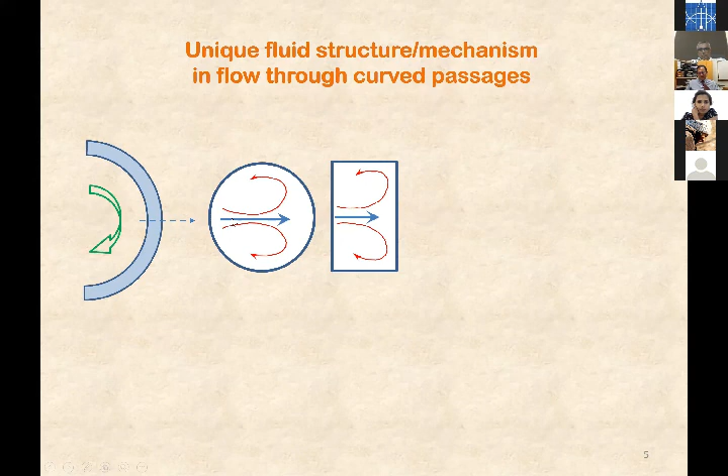Yeah, I will go back to the very beginning, one of the very early slides. So here you can see that direction. Okay, is the red color representing the Dean's vortices, or no? No, this is the secondary flow, the secondary vortices. Correct. Now, this is fairly obvious, I think that's intuitive. Fluid is moving in that direction, and then it takes a turn due to the frictional effects, and it comes back.

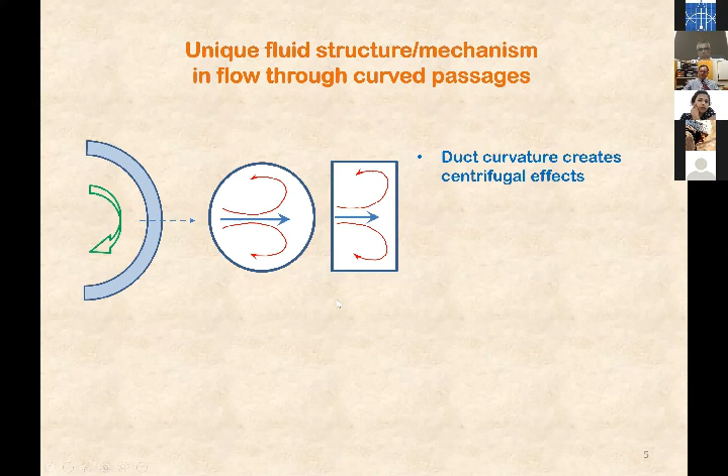But if you look at the Dean vortices, it's definitely counterintuitive. The simple reason is the adverse pressure gradient. As you know, fluid needs a negative pressure gradient to flow - that's normal behavior, meaning if you have a pipe, the inlet will have to have higher pressure than the outlet, and only then will the fluid go in that direction. But in this situation, the fluid is being pushed against the outer boundary due to centrifugal effects. That actually creates what you call the adverse pressure gradient - it's pressure against the fluid. It's like being pushed against the door of a car when the car takes a turn, and there's a reaction from the door to keep you in position. The same thing happens here - that reaction gives you higher pressure at that boundary compared to the other.

This is the lateral pressure, not the axial pressure direction - not from inlet to outlet, but from inner boundary to outer boundary, where you have an increase in pressure. So there are two pressure gradients: one is the axial direction pressure gradient, the other is the cross-sectional, lateral pressure gradient. That lateral pressure gradient acts against the direction of the incoming flow, and this pressure becomes greater as we increase the flow rate - the magnitude becomes higher and higher. At one point, the fluid actually comes to a standstill, hits the wall and becomes stationary. Since the fluid feels pressure in the opposite direction, it begins to go the other way. The direction of the secondary Dean vortices is determined by the frictional effect at that boundary - it's going one way, and it can only turn the opposite direction. That's why it looks counterintuitive.

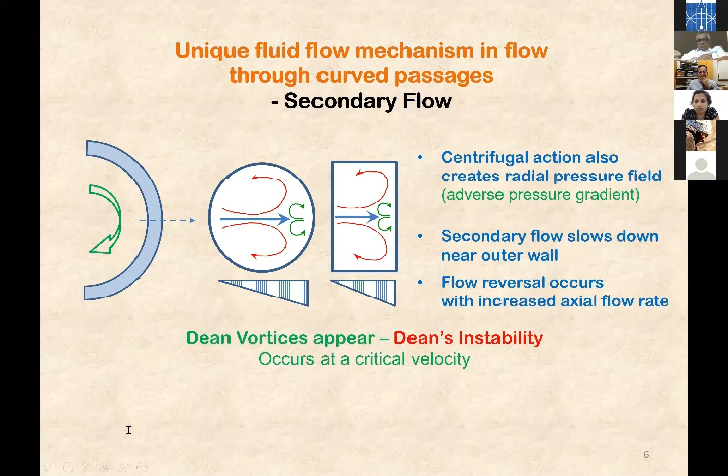Thank you, Tyrone. Any other questions? Yeah, I have just a comment. Thank you very much for the informative presentation. And also, it's nice to see you there again. Sorry, is there any way we can see who's speaking? I will switch it on. No, Chamila, I can't even see the name.

Yeah, okay, I'm Ravindra here from Sydney. I don't know how to switch it on. I'll start the video. Yeah, I may have. Anyway, it might take time.

My question is, I have seen those eddy currents at river bends because that was our field then, especially studying river morphology, and that was very interesting. Currently, late last year, we saw some people talking about self-compacting concrete.

Self-compacting concrete being pumped to big bridge beams from one end to the other. I always wondered how concrete is traveling without getting segregated along the way. And also, when we pump concrete in long distances, once you mix it, it emits heat, it generates heat inside the concrete. And you are doing those kinds of research.

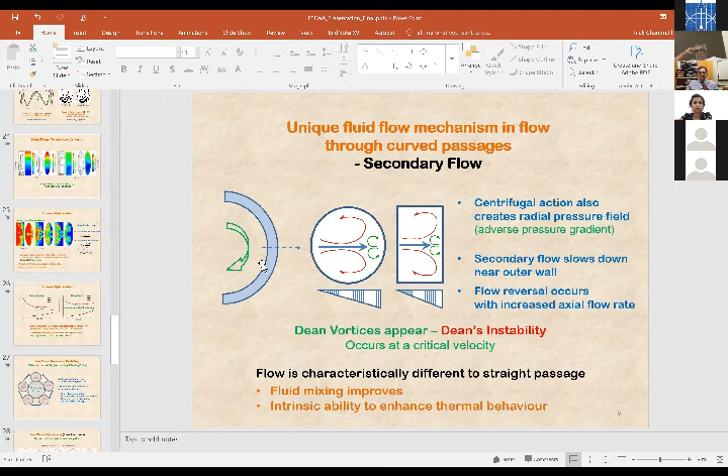So we went only up to that point, and we haven't looked really deep into what you'd call the Darcy formula kind of thing. Okay, thank you. All right, thank you.